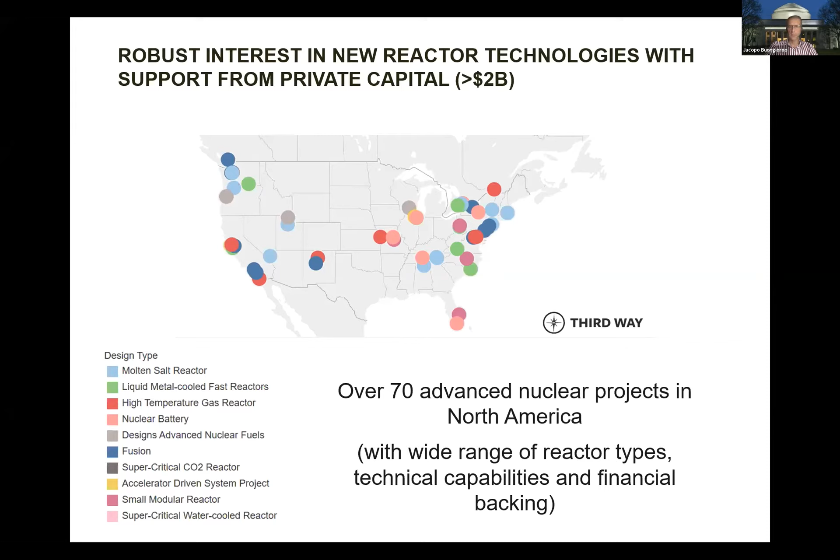Okay, well, so if nuclear is to play a big role going forward, what is the expected business model by which nuclear should play? If you look at the traditional business model, it is based on a very lengthy, decade-long testing and licensing process for new nuclear technologies that come to market, an equally long construction period for very large gigawatt-scale plants, which ultimately are connected to the electric grid. And the combination of these four features is what I call the perfect storm of negative attributes. It takes a long time.

These are big projects, multi-billion dollars, and when they're done, they're connected to the electric grid, which is sort of the ultimate commodity market. So there is no added value for the product that is generated by these nuclear plants. And I would argue that that traditional business model in places like the United States and Europe has become economically very, very unattractive.

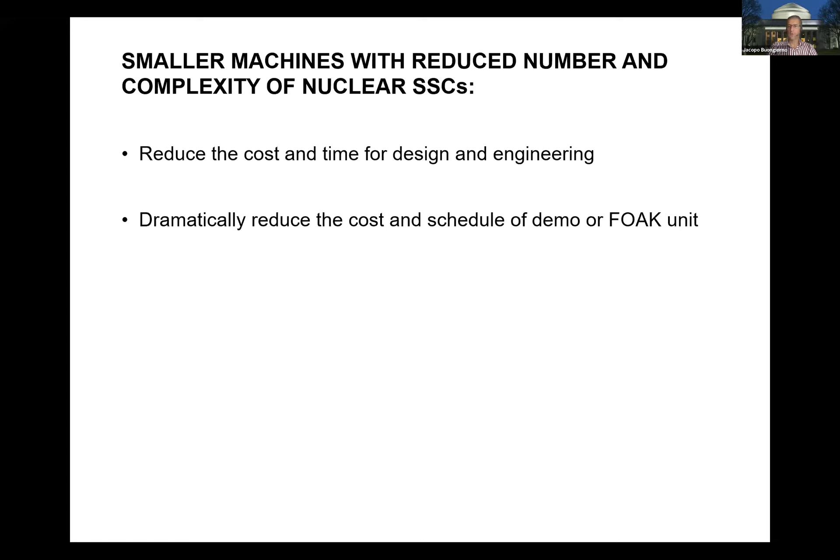Smaller machines, I think the industry in the US particularly gets this, and so the trend is definitely to go towards smaller machines with a lower number of nuclear system structures and components, and therefore lower complexity. This just per se reduces the cost and time for designing and engineering a nuclear power plant. And it also quite dramatically could reduce the cost and the schedule of that all-important first demonstration project, which ultimately is going to set the tone for the series of additional units that are going to be built after that, as well as the first-of-a-kind commercial. So let's quantify these numbers a little bit more.

A traditional large gigawatt-scale light water reactor produces roughly 1,000 megawatts, and sometimes even more, 1.5, 1.6, very large machine, can take order of $10 billion. Again, these are costs in the West. In China, in Korea, they routinely come in with a third of this cost, but that's what we've seen in the West, and it takes a decade. Very, very big, very long projects.

There is a new class of reactors that people are excited about. They're called small modular reactors. They're essentially shrunk or miniaturized versions of these traditional technologies. They use the same fuel, the same cladding materials. A lot of the components look the same, but they're smaller in size, so the system is simplified. It still requires substantial civil works, and so in some ways resembles a traditional construction project.

But the order of magnitude of the investment here is expected to be more like $1 billion. So you're down an order of magnitude, which certainly in terms of reducing the financial risk is good news. And the expected completion time would be order of 5 years. The power output for these systems could be between, say, 100 and 300 megawatts. So again, you're down by a factor of 10 roughly in power output.

And what I'm going to focus on today is the last category that you see here on the right. And these are microreactors. I'm going to tell you what I mean by nuclear battery, but essentially the same thing. These microreactors are now systems in which you've gone down an additional order of magnitude, both in terms of power output as well as physical size. I'll show you in the next slide what that really means.

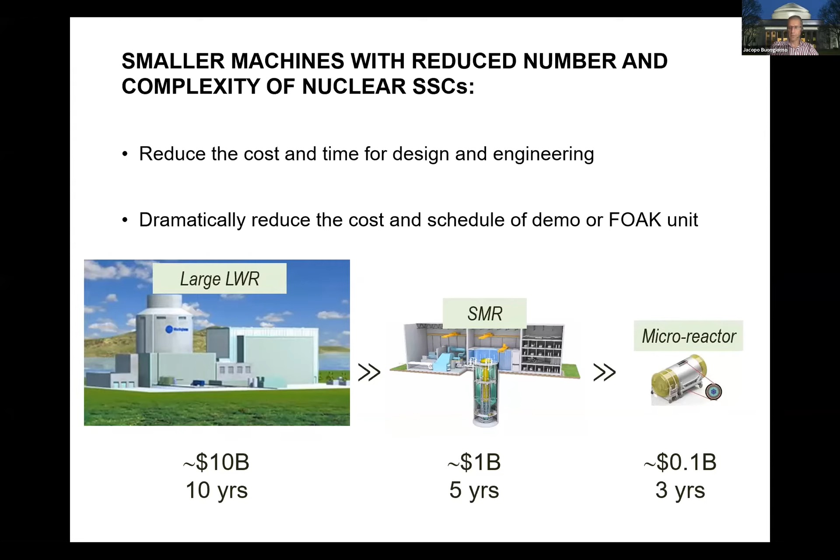The implication of this, based on cost analysis that not only our group at MIT, but other folks in the community are doing, is that the initial investment for construction of one such system could be, for the first of a kind, of the order of $100 million, maybe even less, and it would take less than 3 years actually to entirely build in a factory.

So what is the nuclear battery? Well, it is a microreactor, so it's a nuclear reactor. It generates between, say, 1 and 20 megawatts, really depending on the design, of heat and electricity. Nuclear reactors are heat sources, and then in order to produce electricity, you need to attach it to a power conversion cycle. It is carbon-free because it's nuclear energy-based. These systems are designed to be dry-cooled so that you're not tied to proximity with a body of water to get the water that you need for cooling. They just use the atmosphere as the ultimate heat sink, as we call it.

It is a fully standardized reactor design, which is not expected to depend on the site. It is entirely factory built. You can see the scale here. It becomes transportable in a semi-standard ISO container. You see the scale there again in the figure here. It has standardized connections that essentially make it plug and play. So this system is expected to be online from the time that it arrives to the site in one piece to the time that it starts to generate either electricity, heat, or a combination of both in a matter of days or weeks.

So vastly different time scales from traditional construction projects. Because of economic reasons, you cannot afford to have a large number of operators on site. The system is simple enough that it can basically be designed to be semi-autonomous or fully autonomous with remote monitoring and very, very limited remote control. This is feasible and has already been demonstrated even in non-nuclear systems of much larger size and complexity than

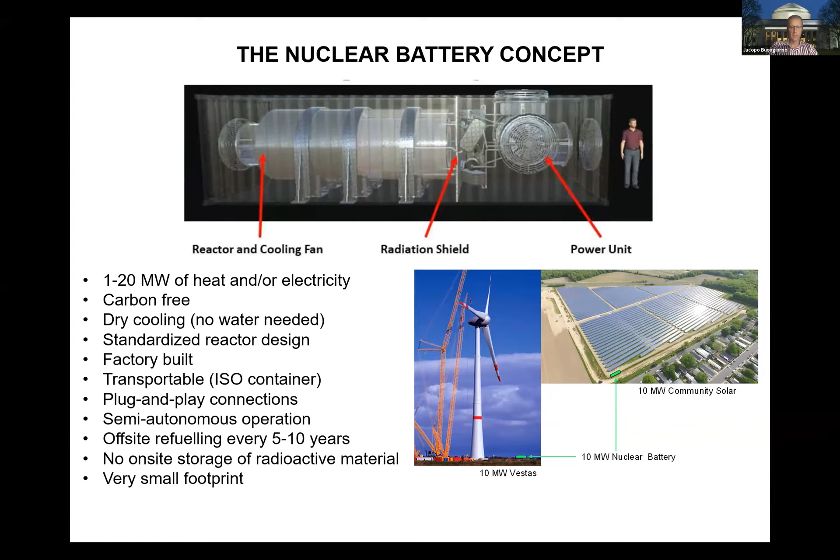The nuclear battery has a minimum 2 orders of magnitude lower footprint per unit energy generated than other low carbon alternatives. The image that you see here superimposes a 10 megawatt nominal wind turbine and 10 megawatt nominal solar panel field with their own capacity factor. So in fact, this would go up by a factor of 3 for solar, a factor of 2 for wind. And the little green rectangle that you see there is the physical footprint of a nuclear battery of equivalent capacity. And of course, with a nuclear reactor, you get dispatchability, so higher capacity factor.

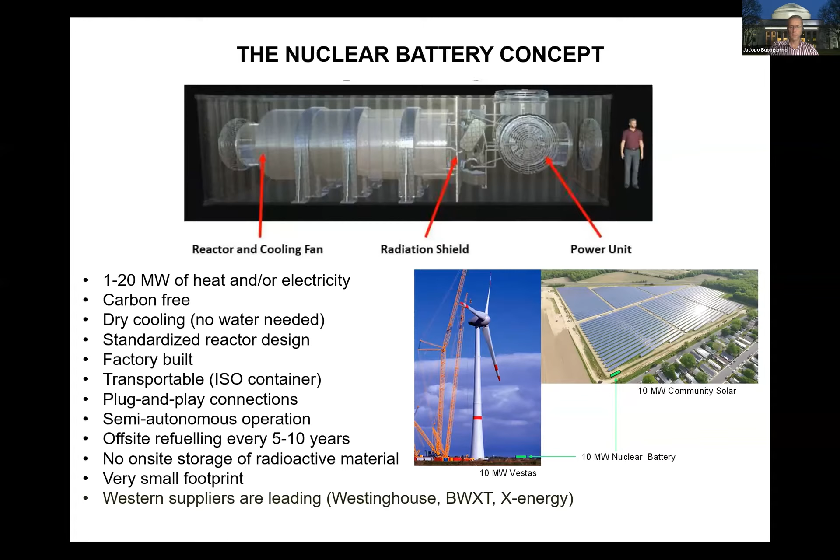Also, what makes this technology attractive and in many ways different even from the small modular reactors, and certainly different from the traditional large light water reactors, is that Western suppliers are in the lead for the design and development of these technologies, whereas the center of gravity for more traditional nuclear, as I mentioned a few minutes ago, has definitely shifted to the east.

Now, the idea of a portable microreactor is not entirely new. In fact, the US Army tested a couple of such portable microreactors back in the 1960s. What has really changed since then is that a whole suite of technologies that can now be used to design and develop and commercialize a 21st century nuclear battery have become mature.

These are things like compact gas turbines, additive manufacturing, robotics, AI, advanced nuclear I&C, nuclear materials, etc. And once again, what makes this palatable and attractive here in the US is that a lot of these technologies happen to be strengths in our country. And so there is sort of an incentive for using them also in this particular field.

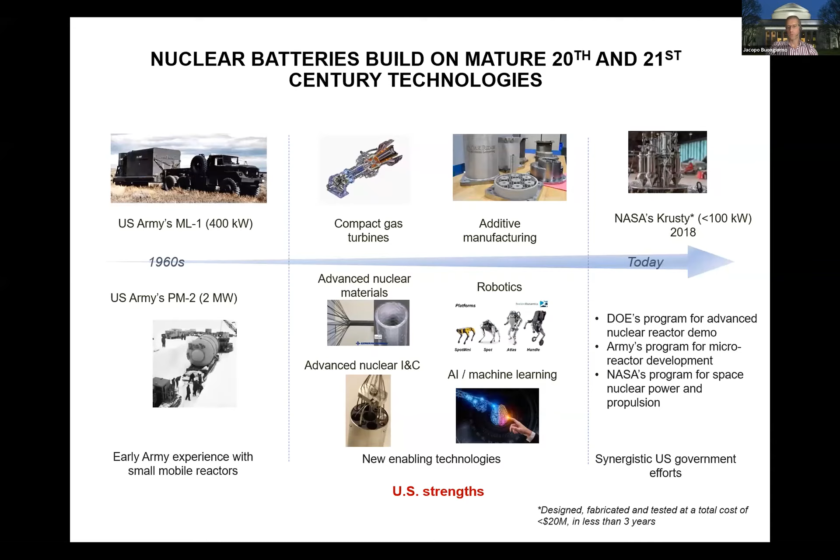Lastly, there is a very strong synergistic effort with government. I mentioned private capital, but the government is not dormant on this particular technology. There are several programs by DOE, by DOD, Department of Defense, as well as NASA for space applications that provide a nice context, the test beds and capabilities and national labs that can be used for developing and testing these nuclear batteries. Now, so that's the small scale part that I advocate for.

The second is the shorter testing and licensing. And what it really boils down to is the safety characteristics of these nuclear batteries. So in general, for any nuclear reactor, there are three basic safety functions that have to be achieved. The first is, in the case of an abnormal occurrence, you want to rapidly shut down the fission reaction and keep the reactor subcritical, as we say. Then you want to continue to adequately cool the nuclear fuel during shutdown. And lastly, you want to prevent the release of radioactivity into the biosphere under any credible circumstance.

Now, there are inherent safety features for these nuclear batteries, as well as what we call passive safety systems, the combination of which allow you to achieve those safety functions with no external intervention.

The inherent safety attributes that I'm referring to are, for example, the use of coolants in the core that do not boil off, or the use of fuel forms that are extremely robust in retaining the fission products, that's basically the bulk of the radioactivity within the core itself, or things like a high thermal capacity of the core, which allows you to absorb a lot of heat without enhancing temperature, as well as safety systems that rely on natural circulation or pressure drops or things of that type, or radiative heat transfer, no moving parts and no need for pumps and diesel generators and things of that type.

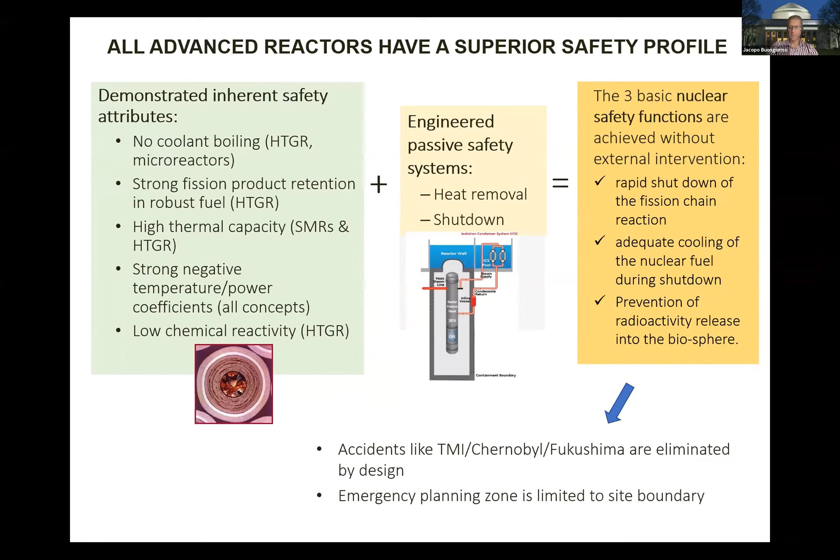So if you combine these two features, then you can basically achieve those safety functions with no external intervention. The implication of this is that accidents like Three Mile Island, Chernobyl, and Fukushima are really eliminated by design. They just basically cannot occur. And very, very important also is that the so-called emergency planning zone is limited to site boundaries. So even under the worst possible scenarios, people living surrounding the power plant or the nuclear battery would not need to evacuate or take any action. And again, that's very important for the social acceptance and the social adoption of this technology.

Now, this is not just theory. This shift in testing and licensing paradigm has actually been tested by NASA and Los Alamos for their space nuclear battery, which was designed, fabricated, and tested between 2015 and 2018 in a little bit less than 3 years, which is unheard of for new nuclear technology, and for a little bit less than $20 million. So very, very low cost. Now, they leveraged substantially the capabilities in the DOE, Department of Energy complex, but those capabilities are available also for the commercial nuclear batteries that I'm focusing my presentation on.

Now, the third element of that shift in paradigm is the higher added value of the energy product that these nuclear batteries can provide. Higher added value for any energy technology could come from a policy signal. In the case of nuclear, that would need to recognize the non-emitting nature, the good economic impact, and the contribution to energy security and resilience that nuclear electricity can provide. When I gave this presentation a year ago, I would say unlikely and beyond our control. Now, with the change in administration, I would say it's possible. There is certainly some serious commitment now in decarbonizing the electric grid, but it still remains beyond our control for sure. Or, in parallel, the idea here is to capture new markets in which nuclear products could sell at a premium. And with the right technology, I think those markets are within reach.

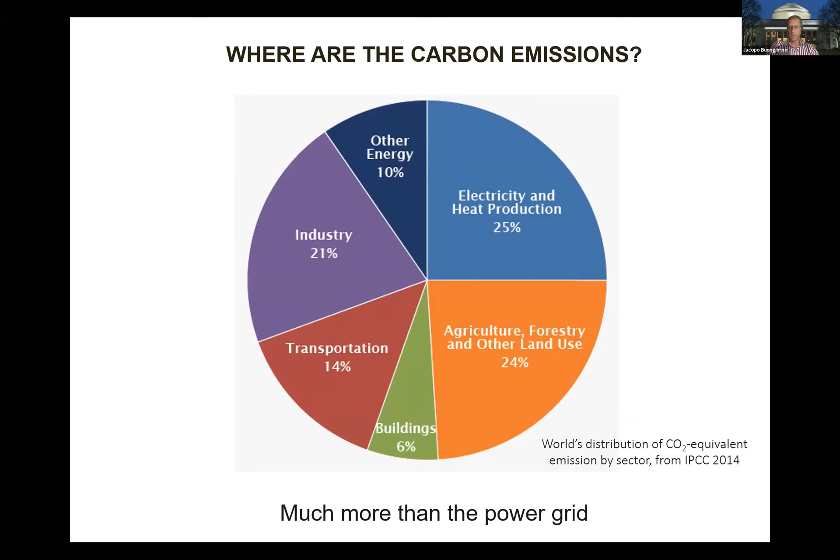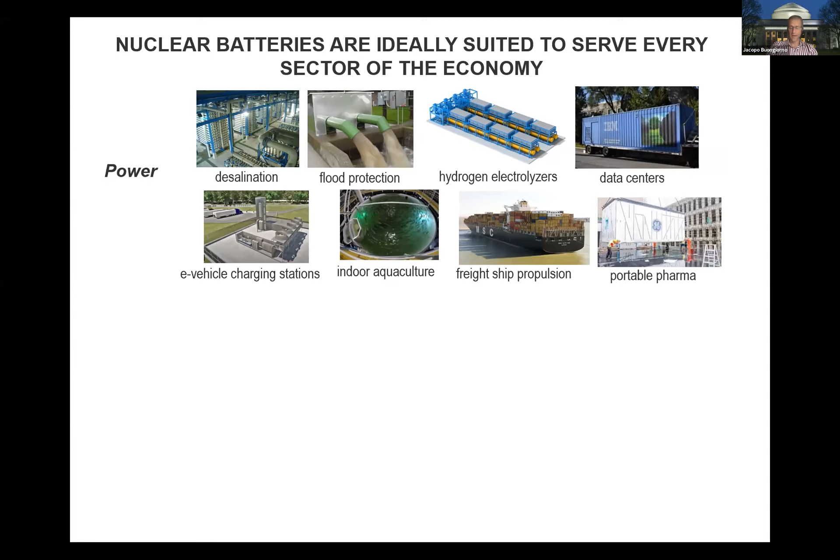So that's where the nuclear batteries can play a big role, because effectively they can provide heat, electricity, or a combination of both to every sector of the economy, whether you are connected to the grid, in the proximity of the grid, or far out. The co-location of nuclear batteries, which are very, very compact and not geographically constrained, with these end users could provide the energy that all these applications require, and it would be carbon-free. So examples: desalination plants or pumps for flood protection. We're going to need a lot of that as rising sea levels are becoming a reality. Hydrogen electrolyzers, even locally, if you want to produce hydrogen for local vehicles without big storage and transmission, you can do that with batteries. Data centers, indoor aquaculture, food or containerized farming, freight ship propulsion, even portable pharmaceuticals.

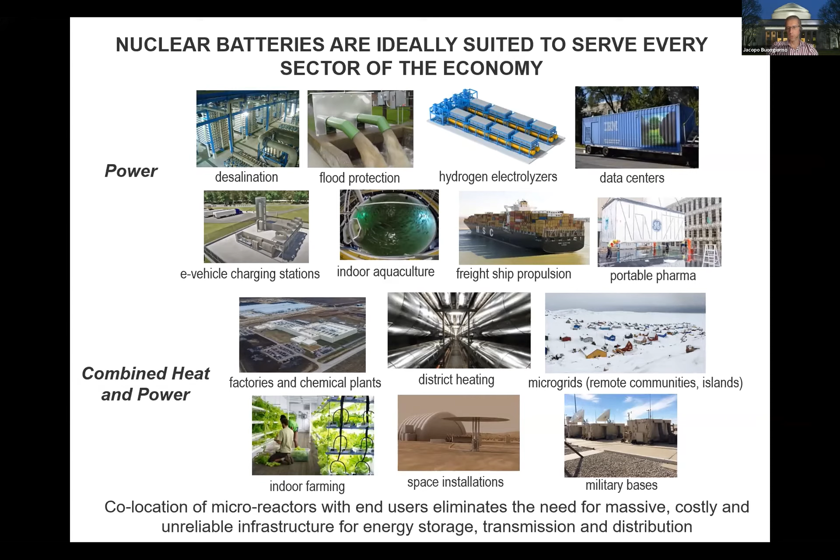And then the big potential game changer is heat, which not a lot of people talk about, but it's actually a much bigger market than electricity. A lot of factories need, yes, power, but they need a lot more heat than they need power. And currently they're burning natural gas, whether they are chemical plants or food processing facilities, et cetera. They're going to need a combination of both, and again, nuclear batteries can play a role there. District heating, microgrids of every type, remote communities, mining sites, military bases. I mentioned space, of course, that's not going to be a big market, and indoor farming already. The co-location of these microreactors or nuclear batteries with the end users eliminates the need for massive, costly, and, as we've heard in the previous presentation, often unreliable infrastructures for energy storage, transmission, and distribution. So the potential, we think, is very high.

So in order for this to happen, well, there are many things that have to happen, but clearly this technology has to be cost competitive. So what we did in our analysis, we first asked ourselves, what are going to be the cost targets for heat and electricity in these markets that we're interested in?

So let's start with heat. For heat, the main competition currently is natural gas-fired boilers. Now, natural gas boilers tend to be too small for carbon capture and sequestration, so burning that natural gas in these boilers will incur some kind of carbon price or carbon penalty in a carbon-constrained world.

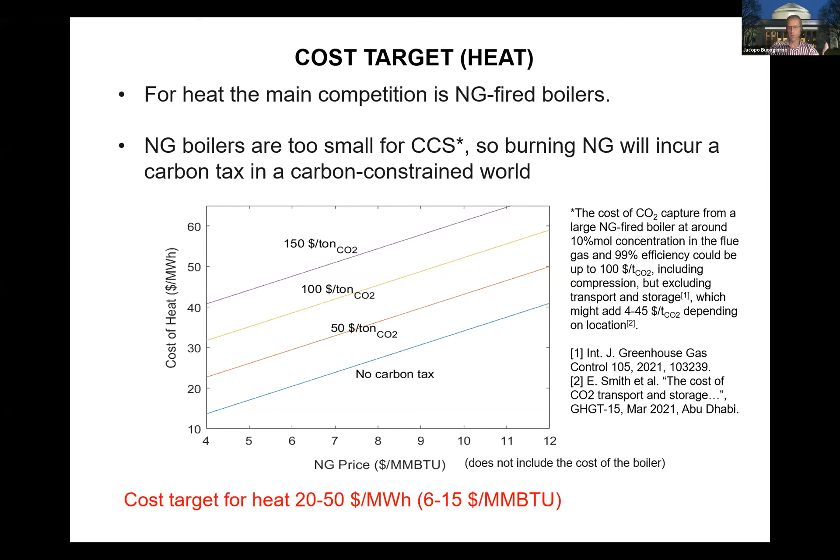So what is shown here is the cost of heat, which does not include the cost of the boiler, so this is just the cost of the heat produced by natural gas as a function of natural gas price for different carbon taxes. And you look at a reasonable range here, the cost target for a nuclear battery that wants to compete against natural gas here would be of the order of $6 to $15 per million BTU. You can see the equivalent there in megawatt hour. Those are megawatt hour thermal, of course.

For electricity, the idea here is that you're going to compete against dispatchable electricity. At the moment, dispatchable electricity really means natural gas with carbon capture. The solar and wind plus batteries in terms of cost are going to be much higher than what we see here. And so we looked at the moment for natural gas with carbon capture.

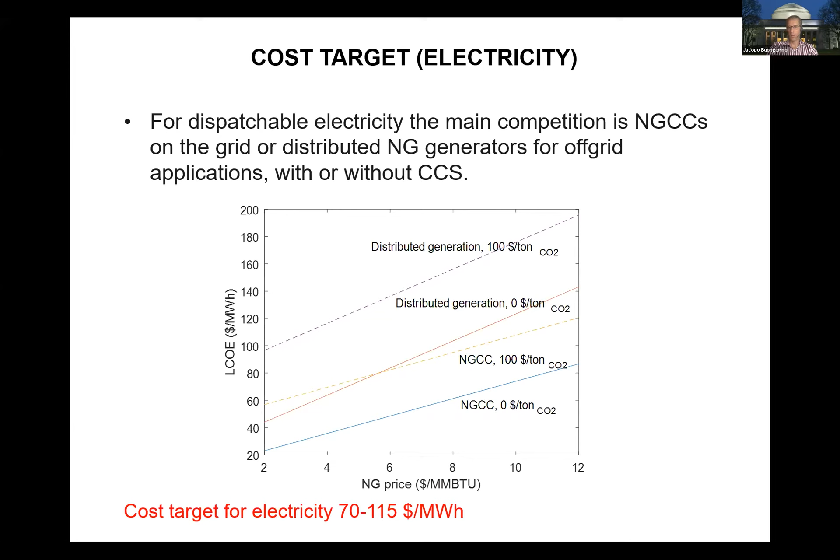And here, whether it's distributed generation or it's on the grid, it makes a little bit of a difference. Whether you put a carbon tax or not on the residual emissions also makes a difference. And so if you look at a range, we think that nuclear batteries that could produce electricity co-located with the end users in the range between $70 and $115 per megawatt hour would be quite competitive for those markets. So those are the cost targets.

And then we said, okay, do we have a fighting chance here? We need to sort of delve a little bit deeper into what these nuclear batteries are going to look like, make some assumptions about the cost and the design features of these nuclear batteries, and try to estimate what is the levelized cost of electricity, and importantly, the levelized cost of heat, and compare these estimates with those cost targets.

So I'm not going to go over this table, but you can see sort of the number of parameters that we need to specify. These are things like, of course, the electric power output of a single unit. What is the thermal efficiency? What is the refueling interval? What's the capacity factor? For how long is it going to stay down for refueling and servicing? Fuel enrichment, discharge burnup, cost of uranium feed, conversion, the number of FTEs, the number of operators that you have on site, the compensation, and then economic lifetime, cost of decommissioning, discount rate, et cetera.

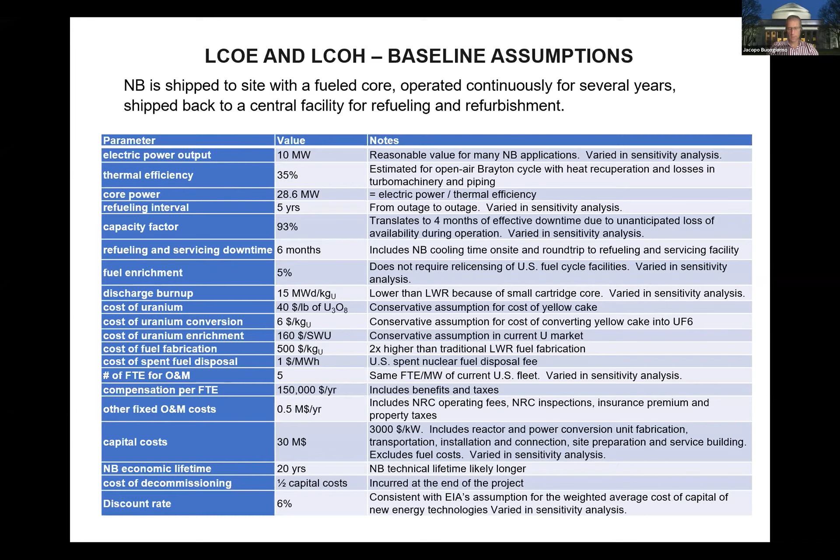So all these things, if you're interested, there is a paper that we published in Energies less than a month ago, and you can see all the assumptions that we made and justification for those assumptions. Now you then calculate your levelized cost of electricity or your levelized cost of heat, very straightforward. You have to annualize fuel, operation and maintenance and capital costs, and then at the denominator, if it's electricity, you get electric power. If it's the cost of heat, the thermal power. And you get a point result for LCOE and LCOH.

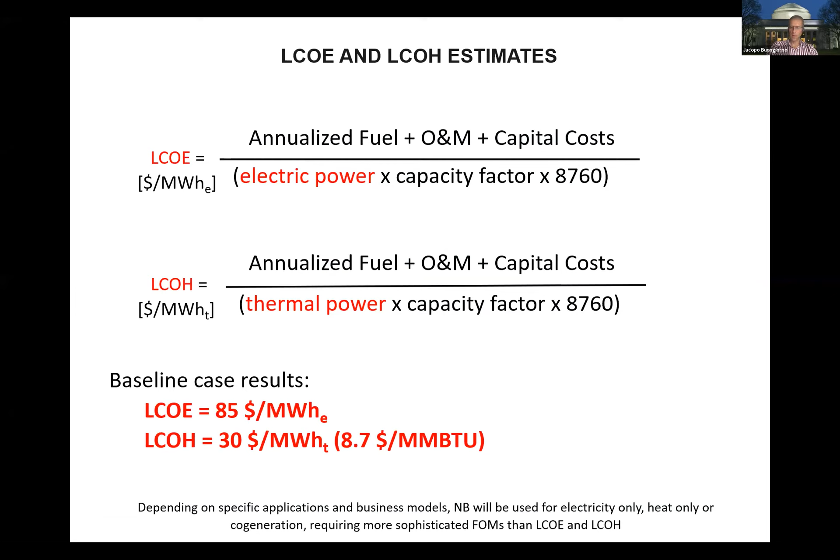And it turns out that these point results, or sort of these baselines, are well within the range that we're interested in. So that's encouraging. But of course, you have to recognize that the uncertainty in the assumptions that we made is massive. And so what we did next was a parametric study, if you wish, a sensitivity study, to see what are really the cost drivers. And if some of these cost drivers deviate significantly from the baseline level, how does that affect the levelized cost of electricity and the levelized cost of heat?

So we look at 8 or 9 parameters, which are shown here, with ranges. So power output between 1 and 20 megawatt, that's a big range. Fuel enrichment between 5 and 20%. All this qualifies as low enriched uranium, so with minimal proliferation concerns. Discharge burnup is the amount of energy extracted per unit mass of the fuel. Refueling interval is how long it takes between one and the next refueling outage, if you will.

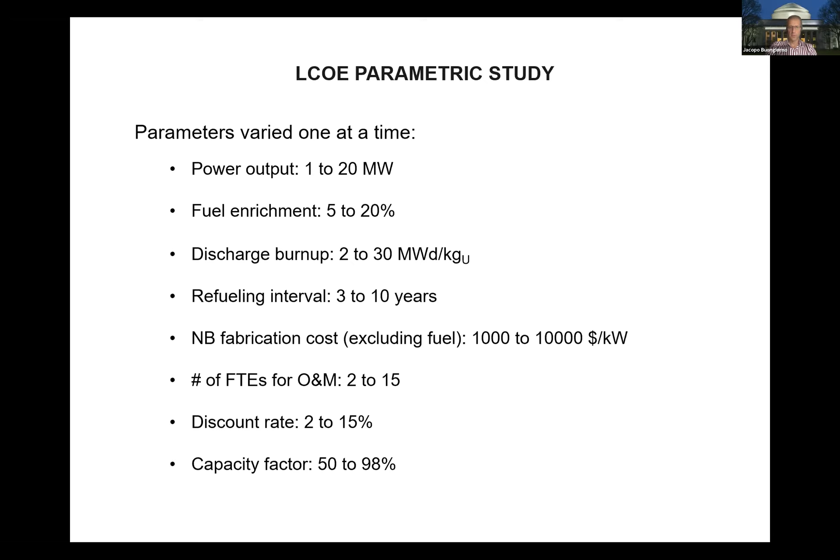The fabrication cost, very important, excluding the fuel, between $1,000 and $10,000 per kilowatt. Again, that's a big range. The number of FTEs for operation and maintenance, discount rate, and capacity factor. Now, I'm going to spare you the long list of plots here that show the different trends and the sensitivity of this. I'm just going to show you, in the interest of time, one that is particularly meaningful.

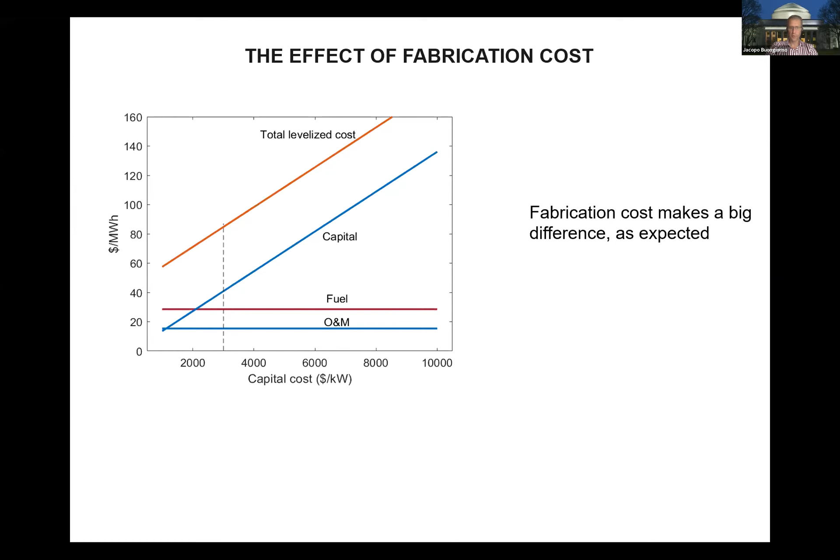As you would expect for all nuclear systems, the capital cost, or the fabrication cost of the machine, is very important. And for nuclear batteries, this is no exception. So what is shown here is the LCOE, dollars per megawatt hour, as a function of the fabrication cost for the battery. So our baseline is $3,000, which we've justified with the bottom-up cost estimates. And I'm going to mention the analogy there with jet engines in a minute.

But if you look, of course, at this plot, you see that as you increase the capital cost, fuel and operation and maintenance costs don't change, but the levelized cost of electricity does change quite dramatically and linearly with capital, because that's the biggest piece. Now, the realism of $3,000 per kilowatt: our baseline power output is about 10 megawatts. So that means $30 million for the construction of the machine, excluding the fuel. Is that high? Is that low?

So if you take a jet engine, which you can think of as a mini power plant, a large jet engine generates about 50 megawatts of mechanical power at takeoff. Of course, that mechanical power is turned into thrust, which allows the aircraft to take off and then stay airborne. That machine costs about $25 million. It's a very delicate, complex machine. In fact, in some respects, more delicate and more complex than the nuclear batteries that we're talking about. And at $25 million, it's about $500 per kilowatt.

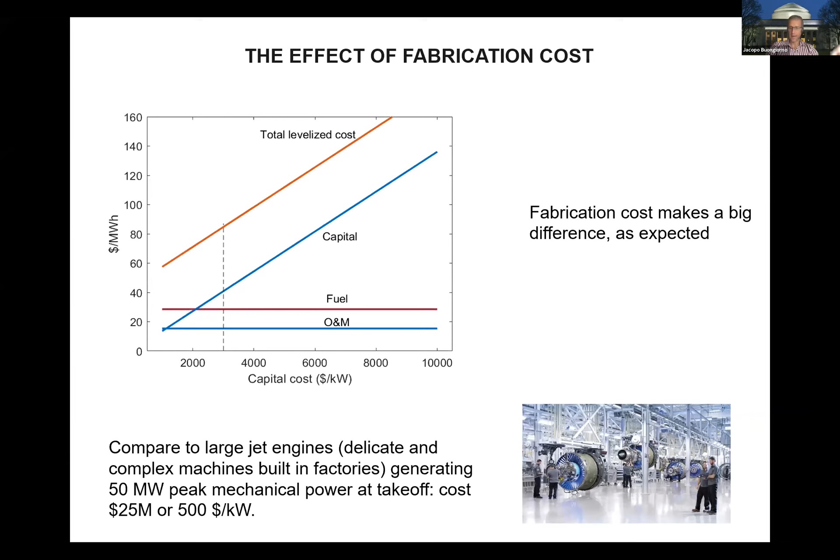Now, the analogy is not perfect, but this is to give you an order of magnitude. It is not unrealistic to assume that a 10 megawatt nuclear battery will cost about $30 million to fabricate. And we have a bottom-up, quite detailed calculation that shows that that's realistic.

Now, there are many off-grid applications, particularly remote communities and mining sites, where even at $300 per megawatt hour, which is 30 cents per kilowatt hour, you could be competitive. So that doesn't mean there is no market. If you are at that high cost, it means the markets are much smaller. So with that, let me close.

The takeaway message is that these portable microreactors, which we've been calling nuclear batteries, have the potential to provide on-demand, that's dispatchable because that's nuclear, carbon-free, potentially economical, certainly resilient and safe energy for distributed heat and electricity applications. Very important, as I've been beating you on the head, in every sector of the economy, not just the power grid. The cost targets are shown there. We think they're quite reasonable, and it appears that the nuclear batteries can meet those targets, depending on the assumptions, quite comfortably, but there are some cost drivers that we need to pay attention to.

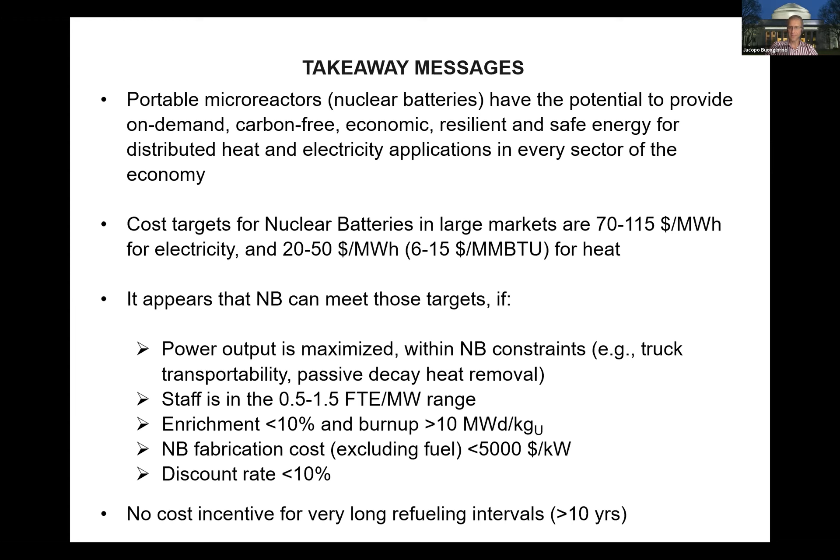And then lastly, we did not find any cost incentive for very long refueling intervals. Some vendors are looking at 20 years without refueling. There might be other considerations that drive that design and make it attractive, the fact that you don't have to change out the nuclear batteries frequently, but in terms of just levelized cost of electricity, we didn't find that to be particularly compelling.